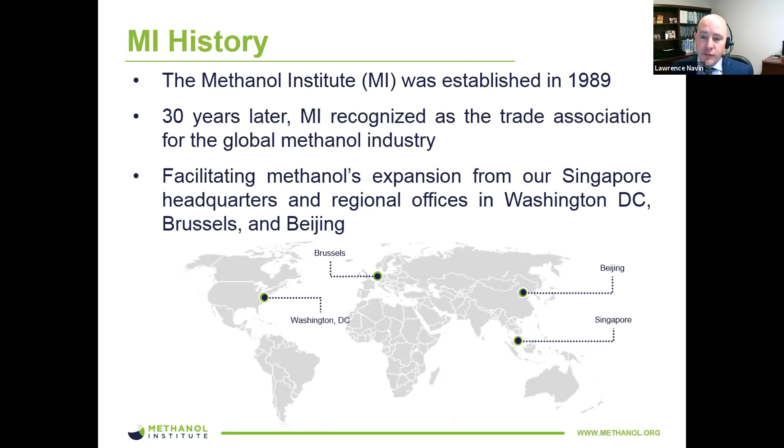As I mentioned, I'm Lawrence Navin, Director of Government and Public Affairs from the Methanol Institute. We're pleased to have the opportunity to speak to you today about the many benefits of renewable methanol. First, let me begin with a short overview of the Methanol Institute and who we are. The Methanol Institute was originally formed in 1989 in Washington, D.C. to lobby the U.S. Congress. Now, 30 years later, MI is recognized as the trade association for the global methanol industry. Today, in addition to Washington, D.C., we have offices in Singapore, Brussels, and Beijing.

As you can see from this graphic, the roughly 80 million metric tons of methanol that was sold globally in 2018 has a wide array of uses as a chemical building block in pharmaceuticals, electronics, and appliances, to energy and fuel uses, which encompassed over 40% of total 2018 methanol demand. In fact, from 2009 to 2018, direct methanol fuel blending has increased at an annual rate of well over 20%.

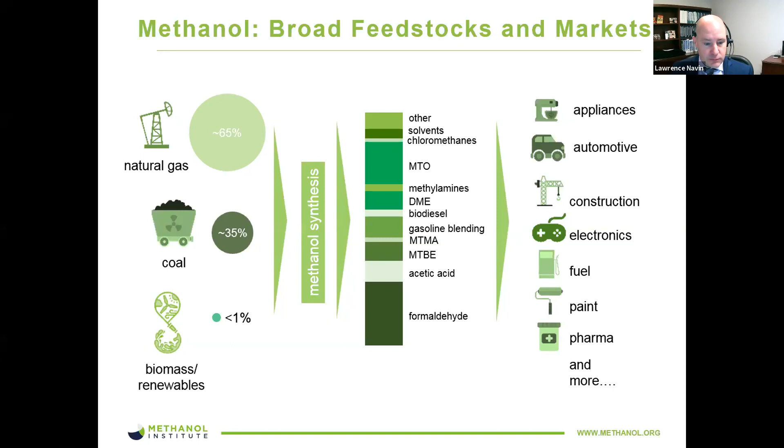In 2018, the Methanol Institute decided to commission ATA Insights to produce a report for us on renewable methanol. This report is intended to serve as a primer on renewable methanol and provides a great overview of this increasingly important sector of the methanol industry. Highlights of the report include applications and uses of renewable methanol, information on renewable methanol production, case studies on renewable methanol companies, BioMCN, Enerkem, and Carbon Recycling International, and more.

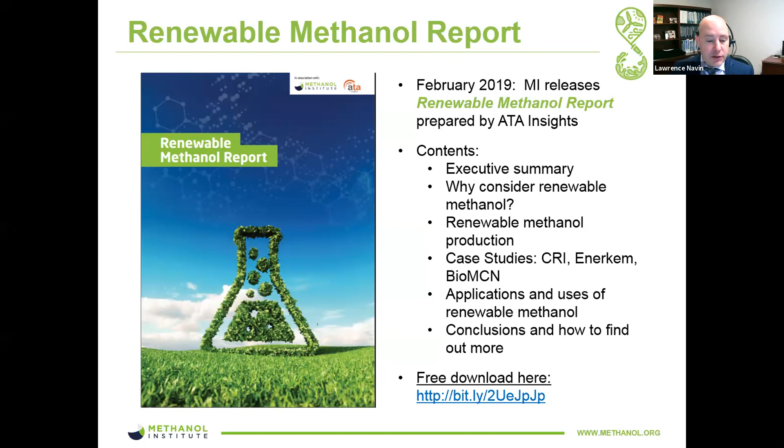As I had noted previously, there are numerous pathways available to produce renewable methanol. Feedstocks include agricultural waste. Agricultural waste yields a great deal of biomass that can be converted into biomethanol without interfering with food prices or availability or encroaching on agricultural land. Forestry residues. A large amount of residual biomass, such as leaves, branches, needles, and wood chip, is produced in the process of harvesting trees. These byproducts can be used as a feedstock for producing biochemicals such as renewable methanol.

Municipal solid waste. Using municipal solid waste to produce renewable methanol creates value from unrecyclable garbage and relieves pressure on landfill sites. 2/3 of municipal solid waste are either dumped in landfills or incinerated. A significant portion of this waste could be diverted towards producing sustainable chemicals, including renewable methanol.

Carbon dioxide. Around 32.5 billion metric tons of CO2 were released into the atmosphere in 2017 alone. With current technology, it is possible to capture CO2 from the atmosphere and from industrial exhaust streams. Power plants, steel and cement factories, and distilleries, among others, produce carbon dioxide that could be used as a source to produce renewable methanol.

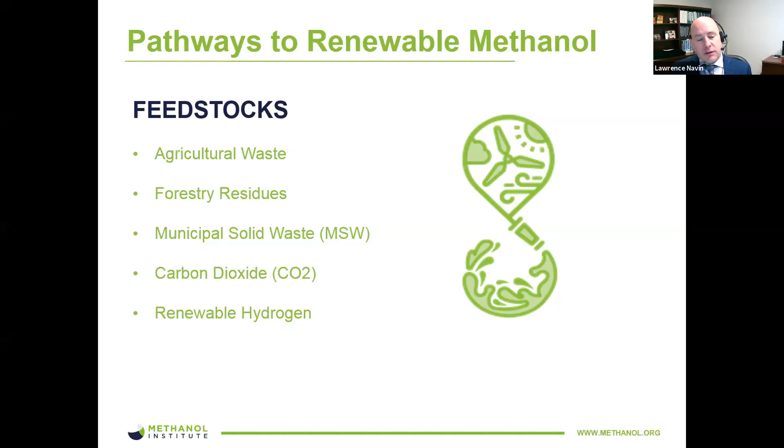Lastly, here on this slide, we have renewable hydrogen. Renewable electricity can be used to obtain hydrogen from water by electrolysis. Each of these feedstocks is discussed in greater detail in the report as well. You can see here in the figures shown various renewable methanol production processes, which result from the use of different feedstocks.

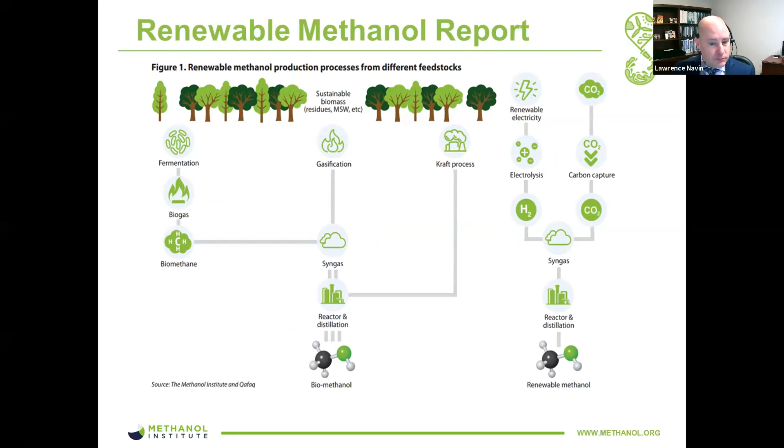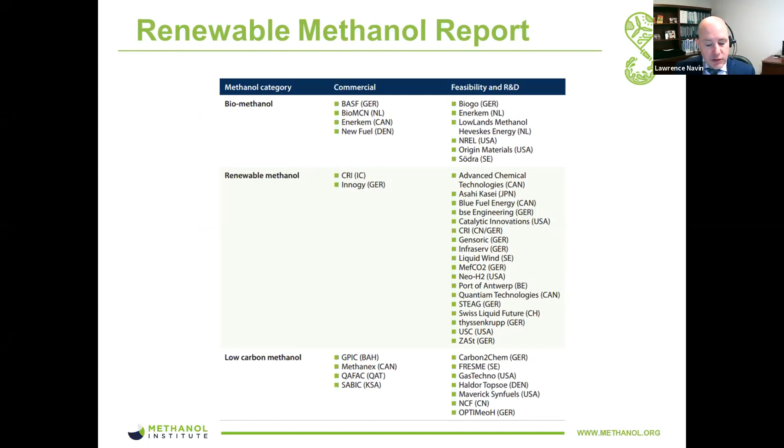This slide shows the growing constellation of companies involved either in commercial, renewable, or low carbon methanol production, and also those advancing through the research and development stages of renewable methanol production. And both of those previous graphics, as well as the one I'm showing now, are available in the report as well.

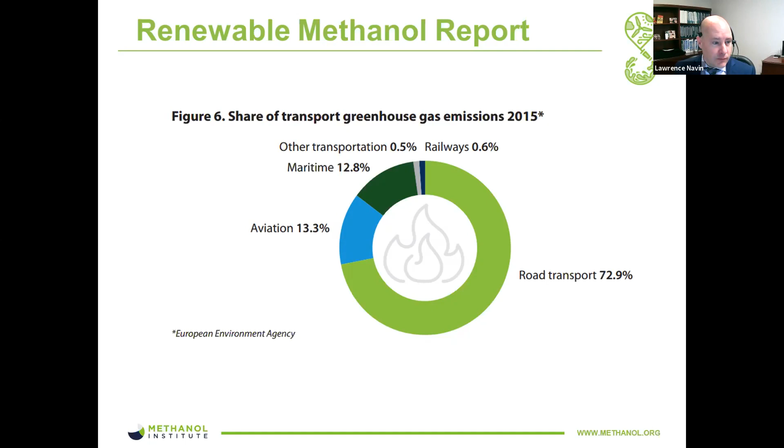This slide, using data supplied by the European Environment Agency, shows the share of greenhouse gas emissions in 2015 arising from each type of transport. As you can see, road transport and maritime are two of the largest categories. Methanol, and by extension renewable methanol, show great potential as both on-road and marine fuels, both for today and the future. As I had noted before, energy and fuel uses already encompass 40% of total methanol demand.

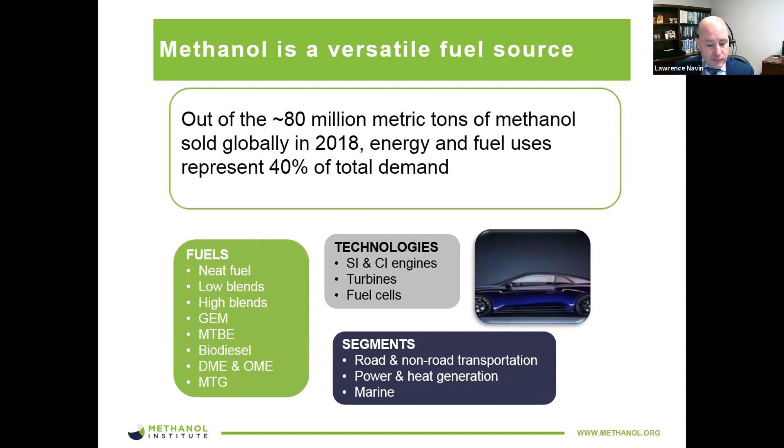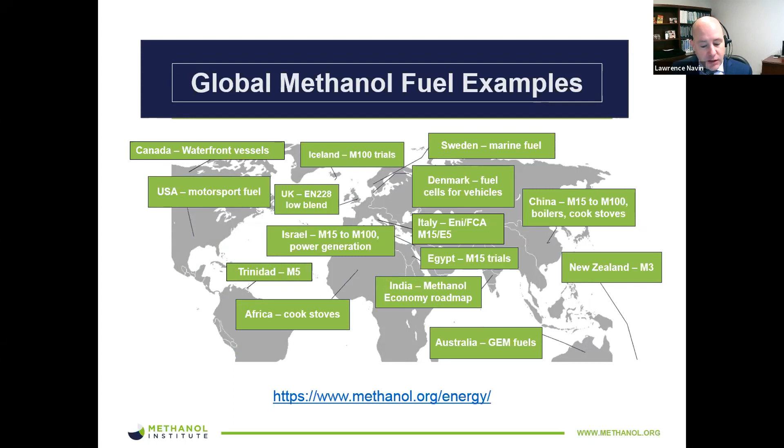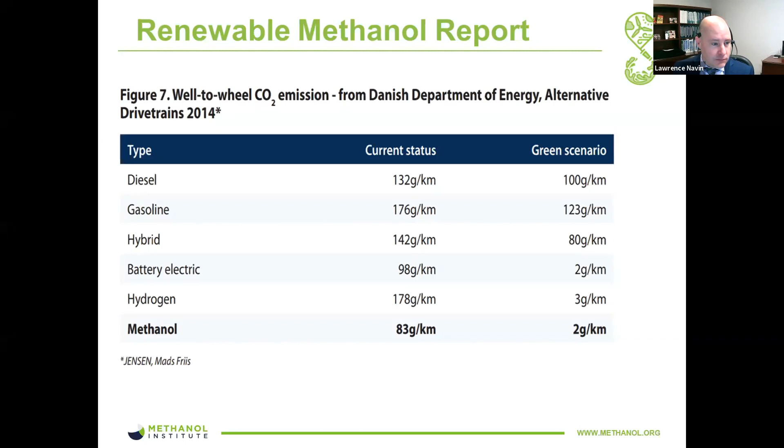One last thing that I would like to briefly touch on here, and Carlos mentioned this in the opening to the webinar, are the potential synergies available when combining variable renewables and renewable methanol. In recent years, solar photovoltaic, hydro, and wind have grown to account for a significant part of the energy mix in many parts of the world. These resources provide clean and affordable electricity, but peak yield may not match peak demand.

This scenario can lead to wasted energy, as transmission systems operators may disconnect the renewable resource to safeguard the integrity of the electric grid. Instead of being wasted, this electricity could be harnessed to generate clean power or as a renewable fuel for cars and ships. You will learn more about this exciting potential from other speakers later in the webinar.

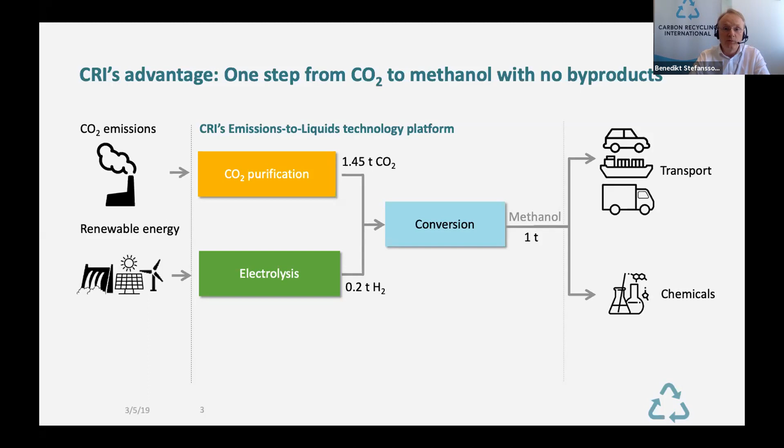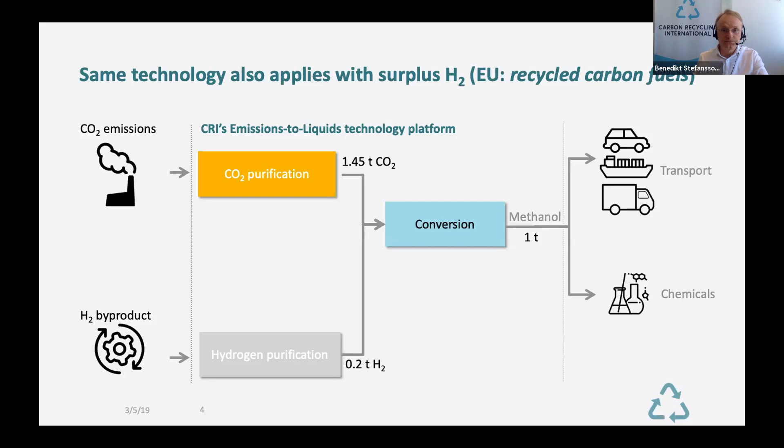We named it after George Olah, the famous chemist who won the Nobel Prize in chemistry, and also wrote a book right around the same time as we were launching the company called The Methanol Economy, in which he describes essentially how methanol can be an essential carrier for energy, both as a chemical feedstock and also as a fuel.

The first commissioning of this plant was in 2012. We upgraded it in 2015 from 4 to 12 tons per day. And it now has a nameplate capacity of 4,000 tons per year and converts, therefore, about 5,600 tons of CO2 for that production. We have baseload electrolysis of 6 megawatts in this plant to give you an idea of the energy intensity.

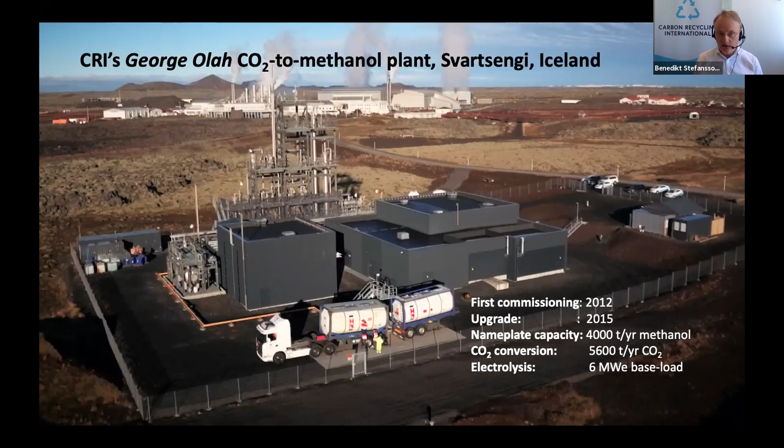In the background, you can see a geothermal power plant that is the source of the CO2 in this case. The volcanic activity is the source of the CO2. But as I was describing in the earlier diagram, this technology, of course, works with any source of CO2. So we have gone from essentially developing this at a very small lab scale until we financed and implemented the industrial scale plant in 2012, then upgraded it in 2015.

Currently, we are working on projects in Europe, which are actually of a smaller vintage, projects where you will only produce approximately 1 ton per day, but they are to demonstrate that we can operate this type of chemical plant with intermittent wind power as well as a totally different stream of energy from the steel gas, blast furnace gases. And these two projects are going to be implemented in 2019 and 2020, one in Germany and the other one in Sweden.

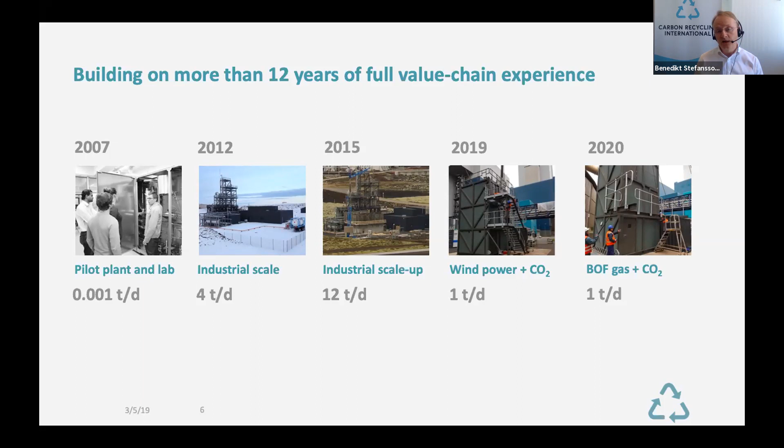Now, why is this process considered to be low carbon intensity or carbon neutral? We have to, of course, think about this in the context of what we're doing today, the business as usual, in which we have a lot of industry that emits CO2 into the atmosphere. We rely in our transport system for 99% of the energy on oil-derived products. And so the oil industry has its own upstream emissions. And of course, this carbon from the earth is then combusted in the vehicles and emitted into the atmosphere and enters as a net addition.

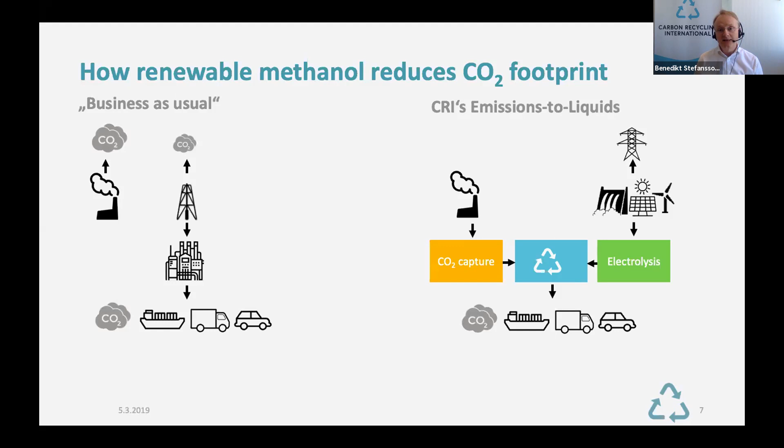Now, if we then do this instead with our process, we can take that CO2 that would otherwise have been emitted by the industrial emitter, convert that into an alcohol, the methanol, utilizing low carbon intensity or zero carbon intensity energy sources. And although the vehicles that use the CO2 are combusting it, we have essentially created a net reduction in CO2 net emissions for the system.

So putting this more into numerical values, according to, for example, here in Europe, European regulation, we should compare what we are doing, our pathway, with the baseline, which is gasoline or diesel. And in that case, if we convert everything into tons of oil equivalent, we would be reducing the carbon intensity by up to 4 tons of CO2 per ton of oil equivalent. And in chemicals, we are essentially sequestering the CO2, and we have a similar or even larger reduction depending on what comparator you use.

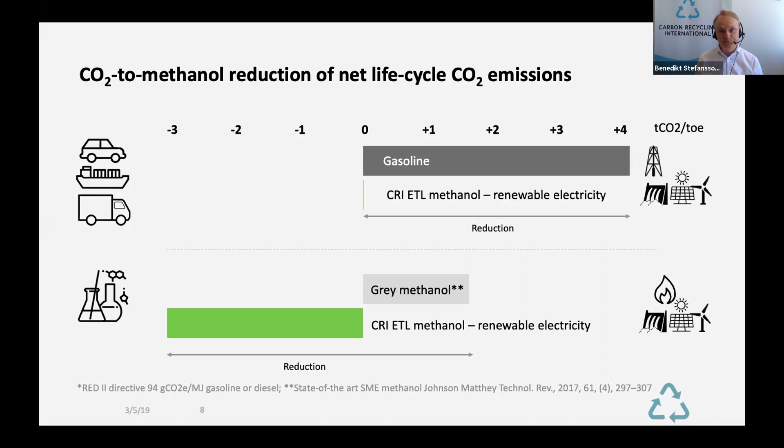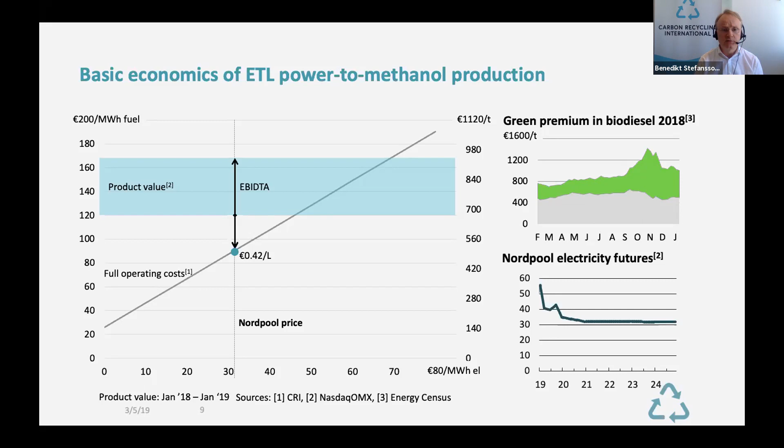And the lower diagram on the right-hand side shows you electricity prices going forward for the next 5 years in the Nordic region, which kind of represents the largest supplier of renewable electricity today in the Nordic countries, Norway, Sweden, and Denmark. And we can see that after basically a spike in electricity prices last year, they're now trending back to about 30 to 32 euros per megawatt hour. And that is what is giving us that value on the diagram that I'm showing you of production costs of 42 cents per liter of methanol, and a product value that is well above that, basically looking at last year. So what we're seeing basically is that we can push down the cost of production, both in terms of CapEx and also by increasing efficiency in the process.

That especially here in the European market, we'll be increasing targets for low carbon intensity fuels, a cap on crop-based biofuels, basically increasing the demand for these new processes, and that other alternative solutions, especially in transport, such as battery-operated vehicles, are limited to light duty and low range. So we see a lot of demand continuing for liquid renewable fuels.

And also energy prices should be coming down. The levelized costs of wind and photovoltaic are falling. Intermittency basically means that you have to invest in overcapacity. This was alluded to before. And there is also going to be congestion on the grid, which means that there will be surplus energy that can be used and transformed into fuel or energy carriers.

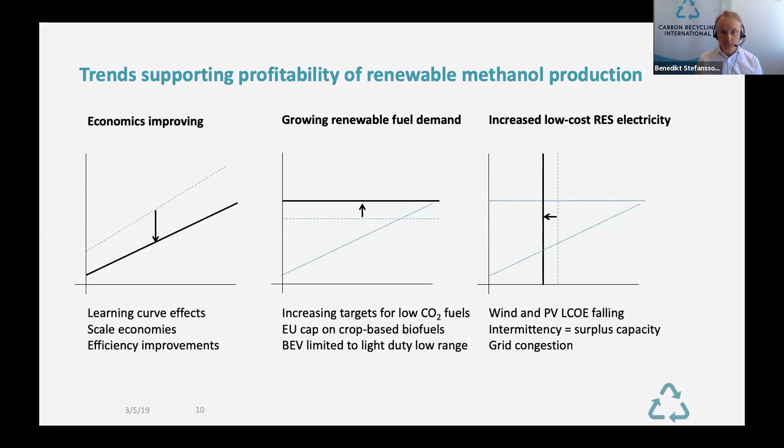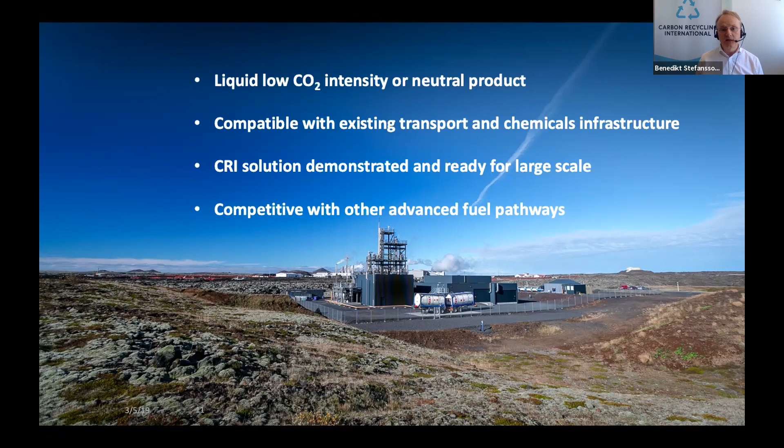So we have the product ready. We are compatible with existing infrastructure. As a company, we now have demonstrated the solution and are ready to scale up and deliver larger systems. And I think what is important also is that we will stay competitive with other advanced fuel pathways. That is, transformation of biomass into fuel is going to be also quite expensive. And that is basically our target, to compete with those and be better.

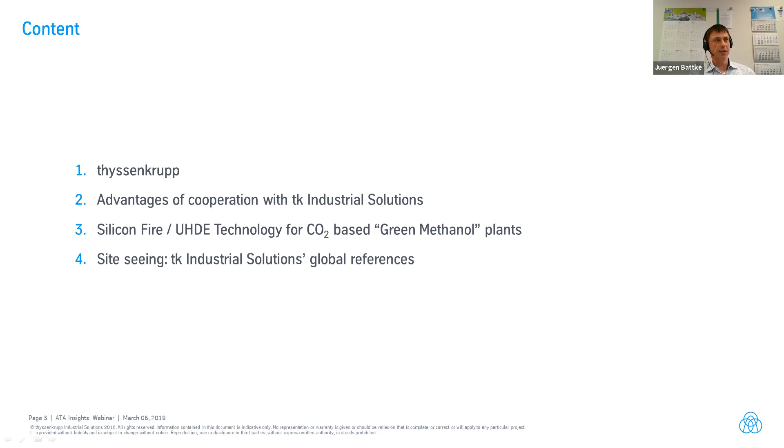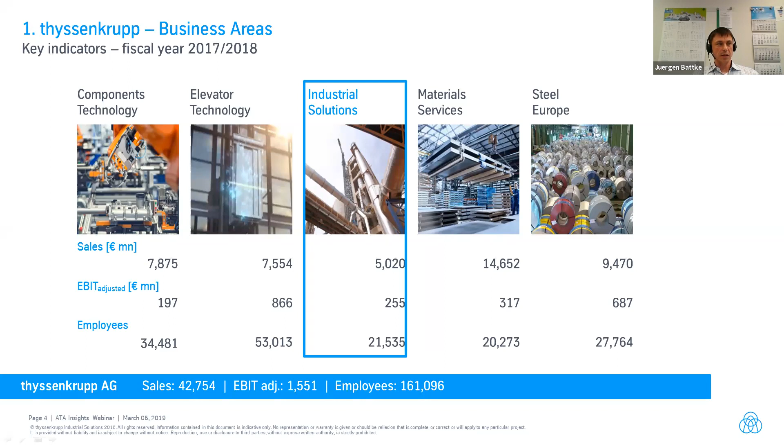ThyssenKrupp itself is divided into business areas, and here in the blue box we have the business area of industrial solutions. This industrial solutions is responsible for chemical plant technologies and engineering, and we are quite big, so we have more than 21,000 employees globally. ThyssenKrupp as a whole had sales of more than 42 billion euro last year, and globally we have more than 160,000 employees in our network.

For instance, if you have a cement plant, our colleagues from cement technologies could convert this cement plant to an oxy-fuel process, and this cement plant will then produce flue gas very rich in carbon dioxide. Our colleagues from industrial specialties could further clean up this carbon dioxide, because the methanol synthesis needs pure carbon dioxide. And of course, this oxy-fuel process needs pure oxygen, which could be produced by the electrolyzer, which of course is producing hydrogen too. Then we have everything complete: pure carbon dioxide, pure hydrogen, and we could convert it by our methanol synthesis from the business unit fertilizer and syngas technologies.

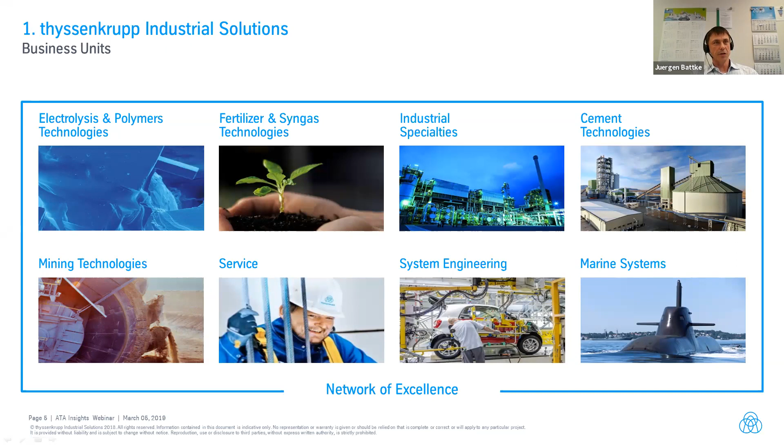So this brings me to the advantages of the cooperation with ThyssenKrupp, because we think we are the right partner for a project, because we can provide solutions for all different phases of a project like building a methanol plant. We can deliver all kinds of engineering. We can do the procurement for your project, and we also could deliver the C part, which is construction and commissioning.

And it's not shown on this slide. We also would like to deliver the after-sales services, spare parts, training, but also assistance to operation of the plant. And even if it's requested, we could offer the operation of the plant itself.

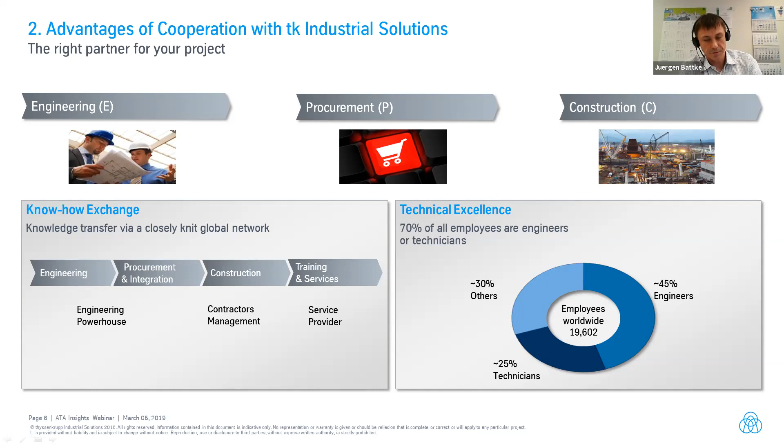That means all the licenses, basic and detail engineering, the EP packages, or the full EPC execution is coming from one single source. And we can do that because we are the owner or the co-owner of the alkaline water electrolysis and the Swiss liquid future technology. So we have everything in place. That means there are no gaps between the different technologies. There are no interfaces with other third parties.

And this allows us the shortest possible workflow so we can minimize the overall project schedule, and actually project duration means sometimes project money or project cost. Of course, we have a track record for delivery in time and in budget. So we are in a position to provide the full competence for all project phases.

So we can start with very early project phases like the project development. We have a dedicated department for project development. We would be happy to support the customer to develop this project. We can prepare feasibility studies. We can elaborate basic engineering, detail engineering. We can do the procurement, construction of the plant.

And I think that's pretty important. We also have a dedicated service business, so we can provide these after-sales services and assistance during the plant operation or operation of the plant itself, build and operation.

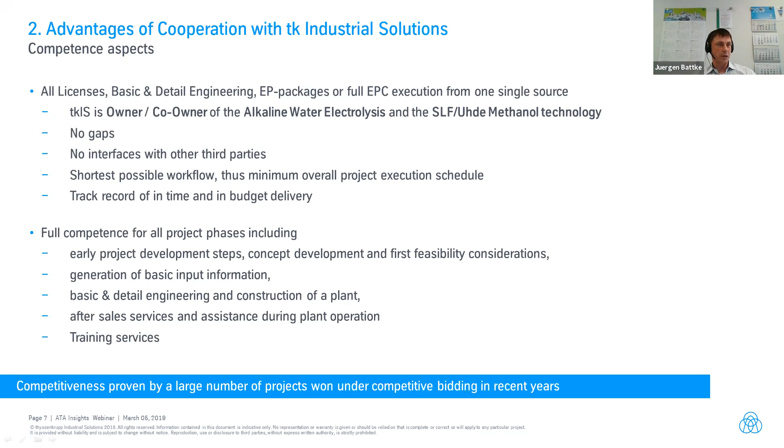Now introducing our silicon fire technology for green methanol plants. And actually everything started with a business idea for small scale plants. The idea was, or one of the ideas was, that we want to store green power as a green fuel. And the green fuel should replace the fossil gasoline.

For this particular project, we considered a decentralized production in direct proximity to the power plant substation. So we have no transmission losses and no transmission fees. The customer should get revenue from CO2 compensation. The production should be independent from oil and also independent from oil price cycles or fuel imports.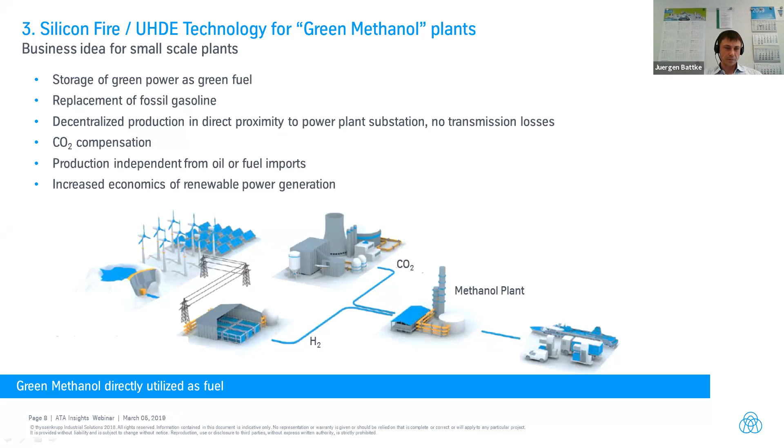And I think this is quite important, that the production of methanol from hydrogen, which is coming from power, and carbon dioxide should increase the economics of the new renewable power generation. For that, we have optimized our methanol synthesis for small and medium capacities.

If I talk about small capacities, what is the meaning of small capacities here? I have put down 12 metric tons per day of methanol. That's about the size of the very nice plant of Carbon Recycling in Iceland. And this would correspond to an electrolyzer power consumption of about 5 megawatts.

But of course, we are also targeting bigger capacities. We call it a medium capacity. For instance, something about 290 metric tons methanol per day, which would require about a 120 megawatt electrolyzer.

The mixture of carbon dioxide and hydrogen we call feed gas. So we have to pressure up this feed gas to the operating pressure of the methanol synthesis. In this case, it's about 80 bar. And in the methanol synthesis, we are producing methanol and also water. That means we have two different phases.

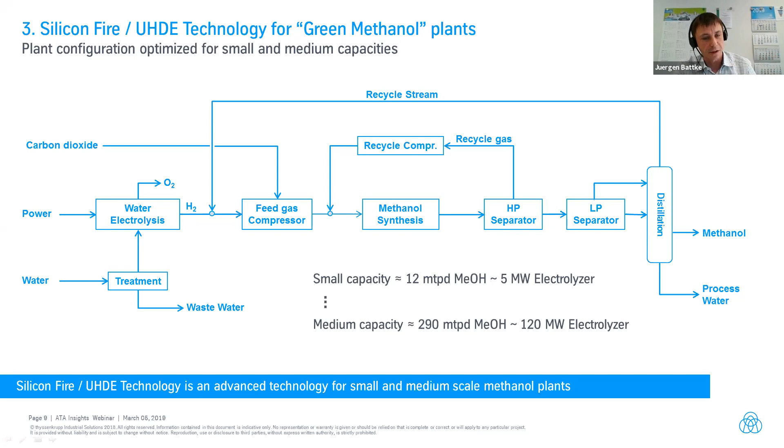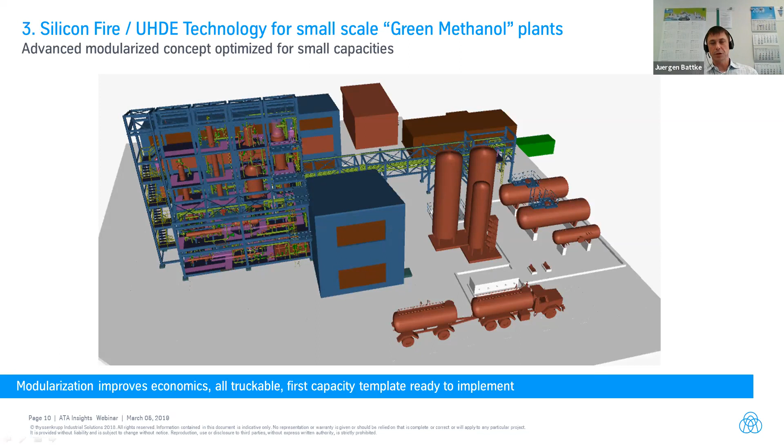I want to close my presentation with a typical project characterization. It's a recent example of a small project in Europe. The plant type, of course, is methanol from carbon dioxide and hydrogen. Technology will be our own technologies, Silicon Fire methanol technology, and our alkaline water electrolysis. The production capacity, it's a small project, is 12 metric tons per day of fuel grade methanol.

A typical scope of supply for these kinds of projects is EPC lump sum turnkey. That means we are providing a fixed price and we're taking construction risk, etc. And due to our pre-configured plant concept, we have a very short implementation period, so we can start immediately if a customer wants to. And since we have our own plant layout engineering, we can consider architectural necessities in protected landscapes, like in Sweden, like in Switzerland, wherever in Europe it might be important.

And what I like is we started this project with a service agreement with temporary operation support, but the customer decided that he does not want to become a chemical plant operator. So we are now negotiating a new agreement for full operation and maintenance. And this is feedback from a lot of power producers. They do not want to become a plant operator. And so ThyssenKrupp is offering full operation and maintenance services.

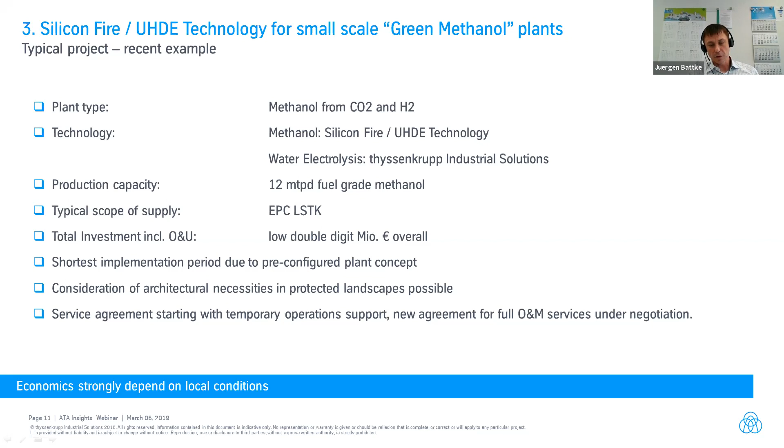However, we have learned that the economics of such a project strongly depend on local conditions. So we invite everybody to take a look at the site together, so that we identify the right site, and we can send our engineers to the site and do a professional feasibility study, and then we can go step by step through the project development.